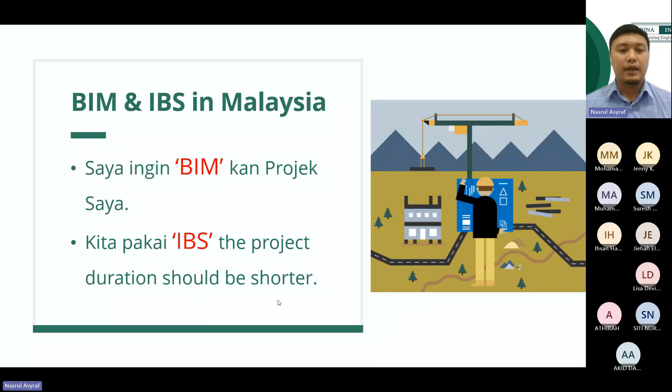And now we are at the stage under substructure.

So a brief introduction on BIM and IBS. BIM is Building Information Modeling, a process using virtual and technical data to create a model of a building or infrastructure. IBS, Industrialized Building System, refers to the prefabrication of structural components which are assembled into a building or infrastructure. Both are two distinct but complementary technologies in construction, both modern methods used in the construction industry. One is BIM, which is virtual, and IBS is physical assembly.

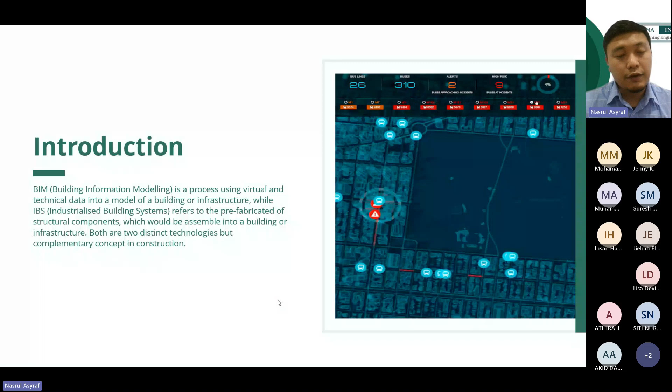With IBS, we manufacture and prefabricate in the factory, which is isolated, so we can control the quality, the manpower, and the condition of the environment. After that, we deliver the precast or prefabricated IBS on site and assemble it there.

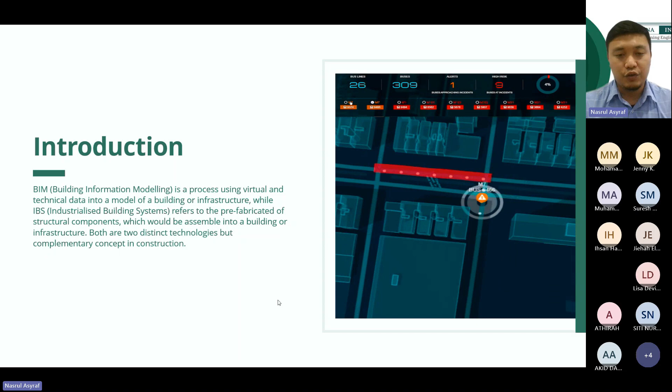While for BIM, in the past we used hand sketches - this was before, maybe our great grandfather's time, sketching manually on technical drawings. After that we had computer aided design, CAD, commonly called AutoCAD, though AutoCAD is actually a product. We draft all the technical drawings into AutoCAD, and it comes out as a CAD drawing file. Now we have BIM.

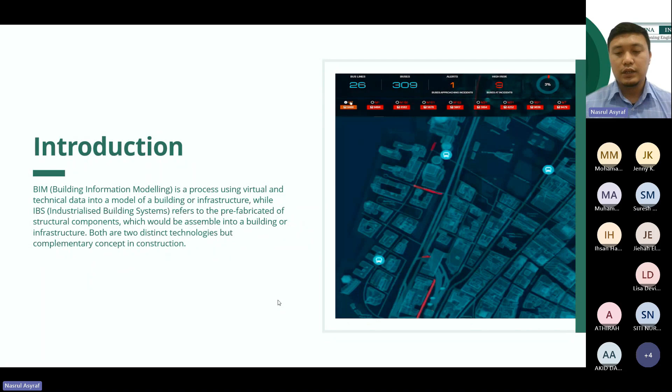BIM is a part of IR 4.0. So what is IR 4.0? It's Industrial Revolution 4.0, which is happening now and will go further, using all the latest technology, including the internet of things. The technology will grow stronger through the collaboration of all technologies.

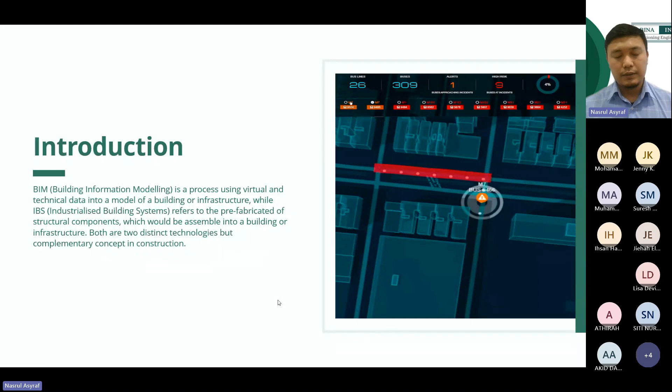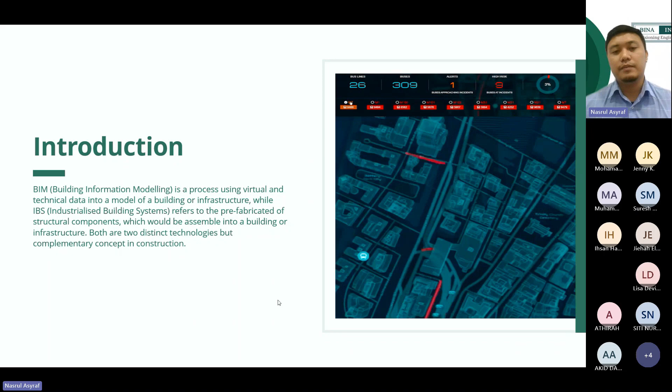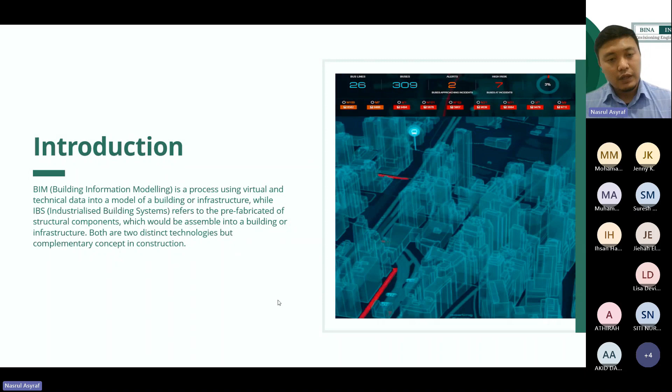Now we don't have manual things anymore, but there's still some part using CAD. In Malaysia we want to push BIM further, because other countries like our neighbor Singapore have adopted it more - last year it was 80% for all projects in Singapore. But in Malaysia right now, we have adopted around 55%, if I'm not mistaken, as reported by CIDB Malaysia.

So let's move on to the definition of BIM and IBS. Modeling, technology, and an associated set of processes to produce, communicate, analyze, and use digital information models throughout the construction project life cycle. This is sourced by CIDB Malaysia.

There is no fixed definition of BIM because every country has their own definition, but in some ways we focus on a single point, which is to communicate, analyze, and use a digital information model. So digital representation is BIM, which is the visual of the building or infrastructure. This is most of the definition by other countries and regions.

Next we have IBS: a system or method of building construction in which components are produced in controlled conditions in the factory or on a construction site, transported and installed during construction with minimal use of workers on site. This is also reported by CIDB Malaysia.

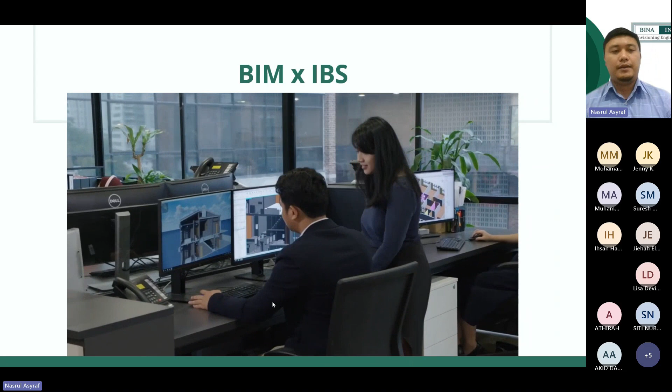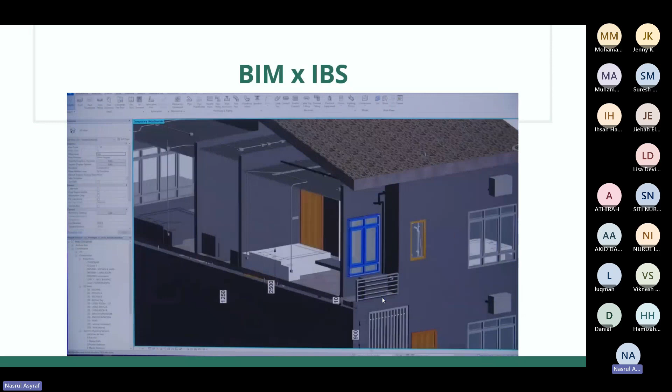Modeling, or BIM, a digital process that integrates the design, construction team, and all relevant stakeholders, improving precision, speed, and coordination from design to delivery. BIM is a digital platform that provides real-time access to project information, enabling visualization of the product throughout the development stage, thus making informed decisions to develop it.

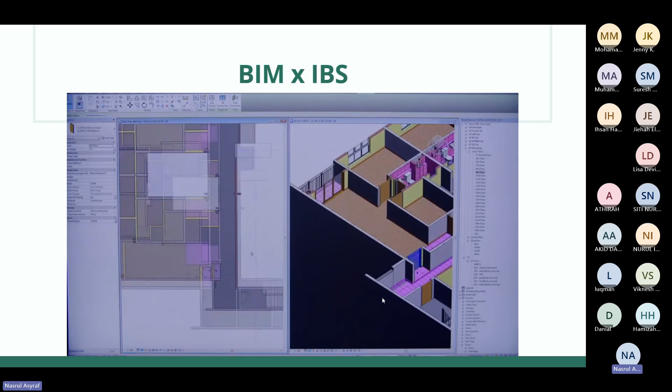BIM enables our designers to analyze and optimize each design and development to achieve higher Green Building Index, or GBI, scores.

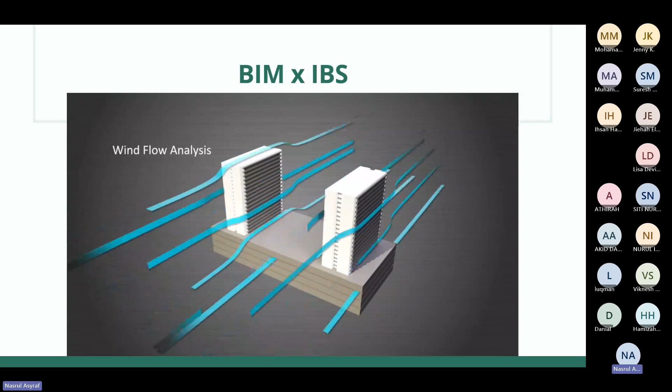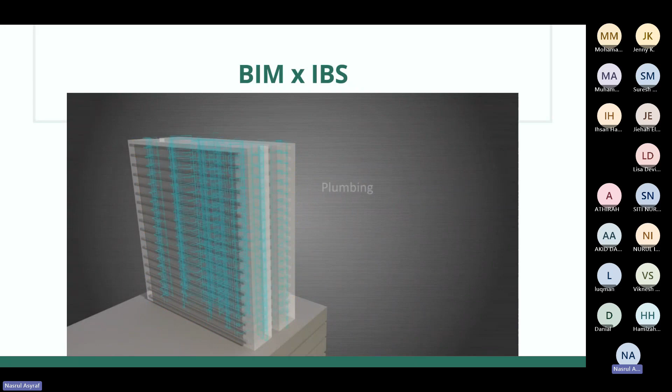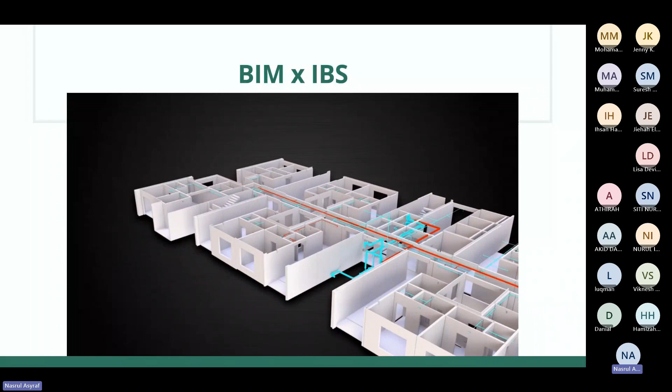The conceptualized 3D designs are then further developed by combining architectural, structural, mechanical, electrical, and plumbing elements. BIM is capable of analyzing these integrated models using clash analysis, and any design clashes can be amended, thus reducing errors and increasing efficiency. These integrated models also incorporate the elements of time and cost, enabling the construction program to be visualized virtually.

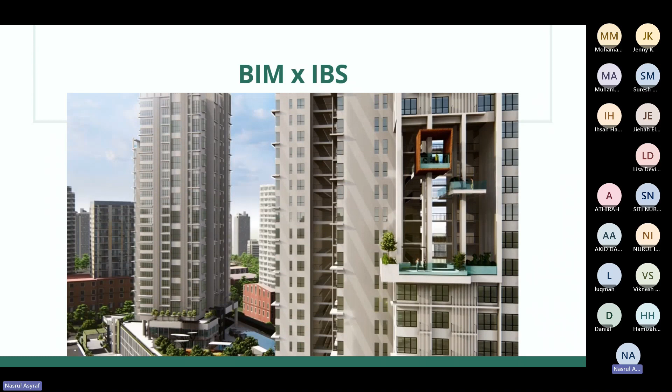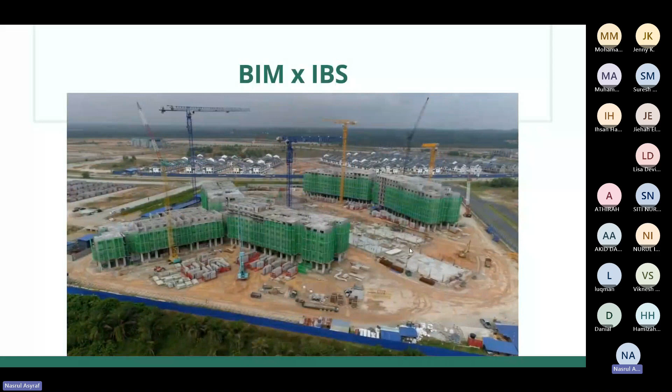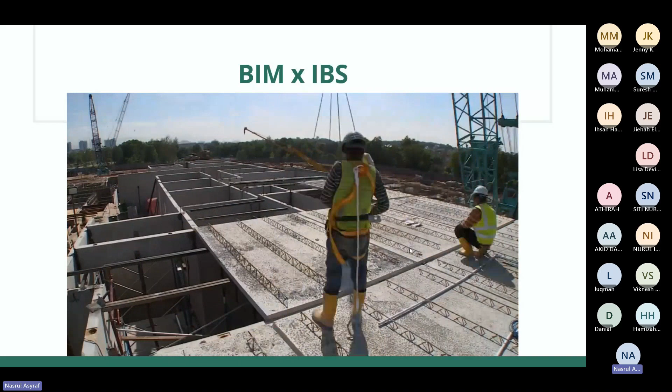Homes for Gamuda Land projects are constructed by Gamuda IBS, Malaysia's first fully automated digital industrialized building system factory. With this technology, homes are produced with stringent quality standards. Construction is faster, and wastage and environmental pollution during construction are reduced.

Okay, so that is how BIM and IBS collaborate into a single project, explained in a short amount of time. Okay, so let's move on. Modeling or...

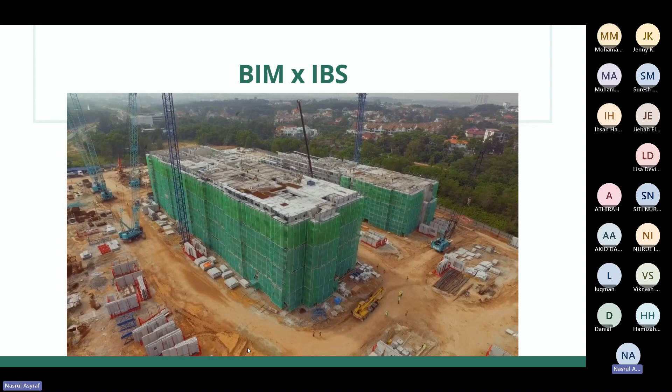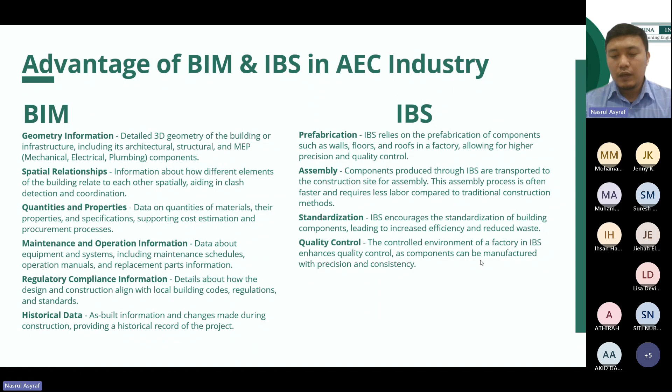So the advantage of BIM and IBS in the AEC industry. I put it in a separate statement here for BIM and IBS, and then we can see how the benefit of the collaboration and integrating of BIM and IBS will shoot up the productivity. Okay, now we start with BIM.

So geometry information. By having a BIM, we can have a detailed 3D representation of geometry. Just now we went through the video where we saw there's infrastructure, there's an architectural component, structural, mechanical, electrical, and plumbing. Having all of this, we can coordinate all of it within one software.

So in this software, when we coordinate all this, we can reduce the time for us to encounter any discrepancy afterwards. During construction, we can avoid all of this discrepancy and issues on site. So when we see this early on, we can make a change directly before the construction even starts. Okay, so that is geometry information - we have the geometry information of all the things.

Next, we have spatial relationship. Spatial relationship is where we use the space by calculating all the space that we are occupying and what space is left. This is good for the architecture, so the architect can foresee all of these components when they place it on the layout of a building or infrastructure, and they can plan it ahead.

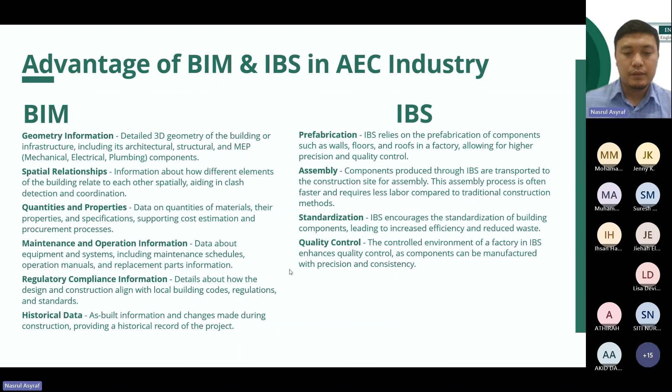So having this, it will impact the project directly or indirectly. For instance, having the conventional way, we might have spent a lot on material. So all these raw materials, when done on site, some of it may spill over, some of it may have a defect before construction even starts, and there's a lot of factors, like maybe rain, then after the rain they wash away all the sand, salt and cement.

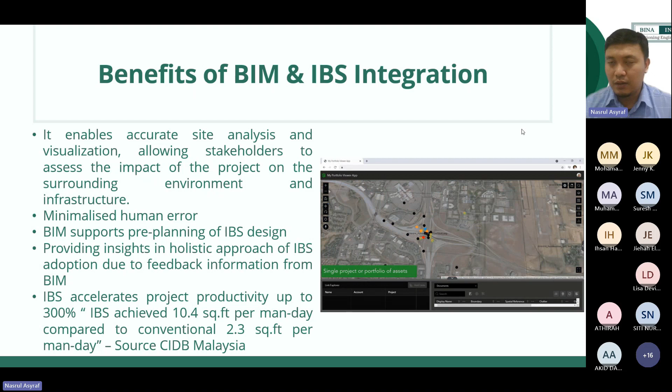This can be a factor that reduces the acceleration of the IBS project. But still, if we compare it to the conventional way, it's still good enough.

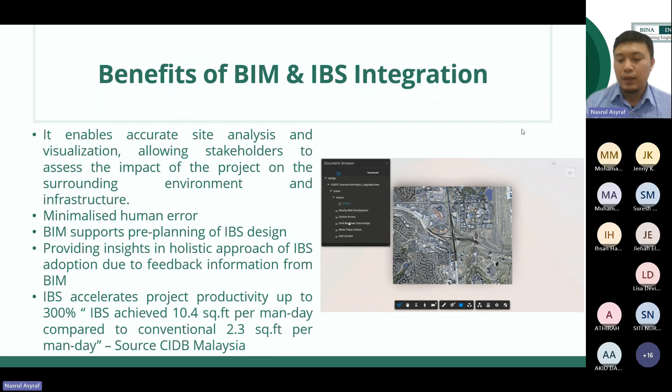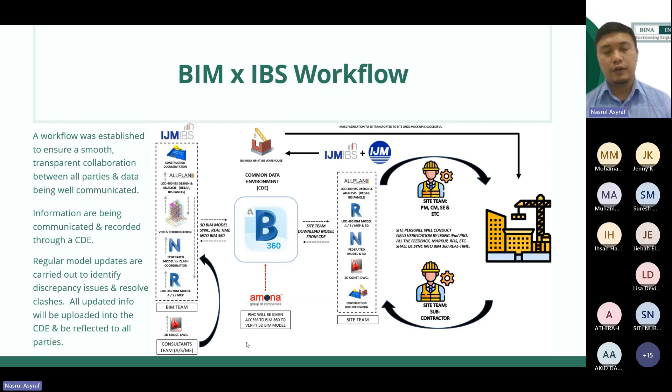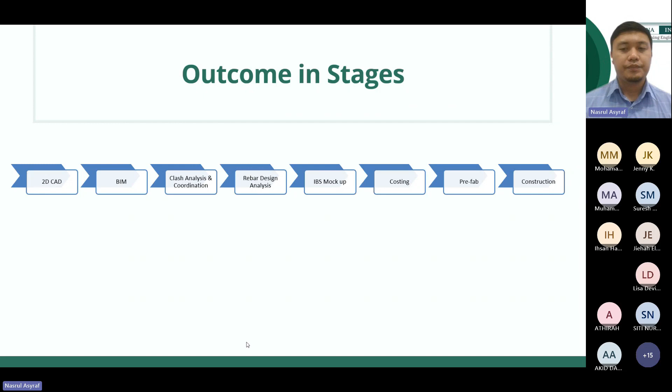Then we do an IBS mockup. We put the IBS mockup as a way to see how the final product looks. We need a mockup to see what we can improve or reduce. This helps minimize issues when the IBS components are delivered on site, where there might be discrepancies or issues during the assembly process. Having this mockup gives us a lot of insight.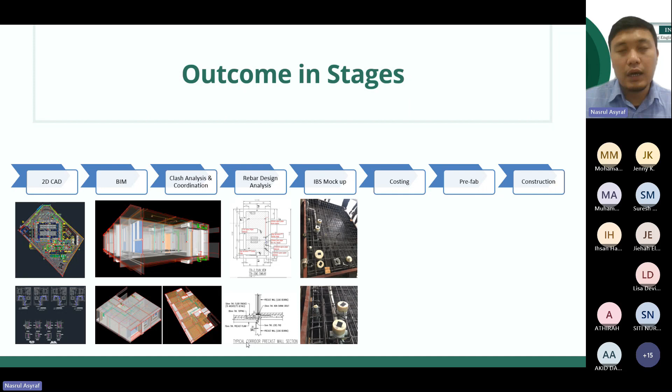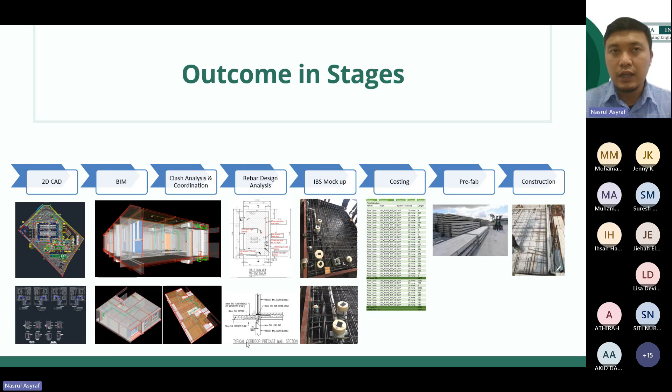Next, we have costing. As I mentioned, we can do extraction on the quantities and properties, and later put the cost on each of the quantities. Then the prefab process: all these prefab components are ready-made and ready to be delivered on site for construction, where we do the assembling process.

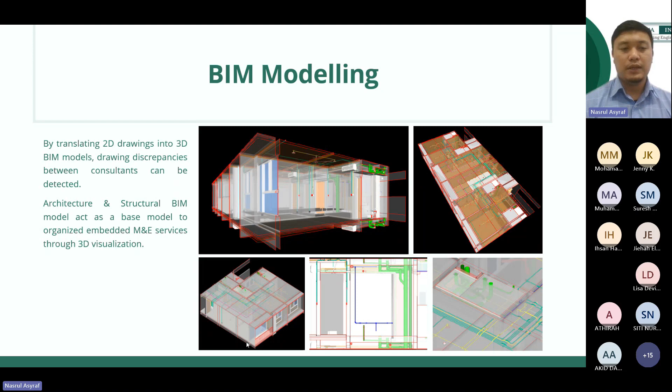So this is one of the BIM modeling, translating 2D drawings into 3D BIM models. Drawing discrepancies between consultants can be detected. The architecture and structural BIM model act as a base model to organize embedded M&E services through 3D visualization.

Next, we have clash detection and coordination. Clash analysis was carried out to identify issues regularly and resolve them prior to prefabrication, as I've explained.

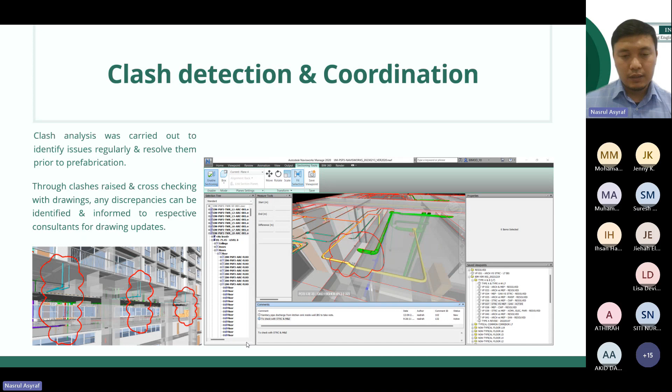So next, we have documentation. Documentation is a great way to detail out all the components needed to plan for IBS manufacturing, such as the opening for pipes and so on, as we can see in the sample here.

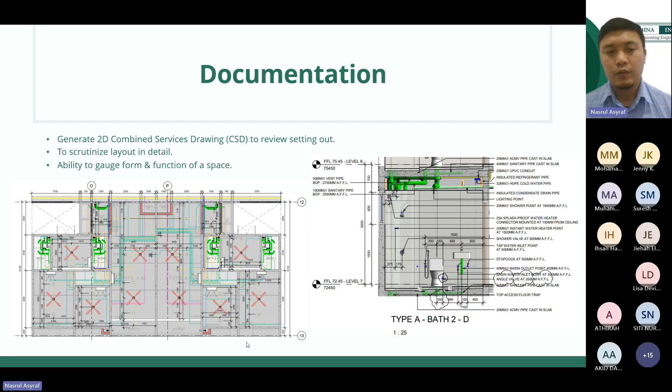Next we have quantity extraction and cost estimation. I mentioned the ability to extract quantities to assist with assessing costing during the tender stage, and later during construction we can follow up on what has been spent and what has been done on site. Here, for example, domestic cold water piping length was extracted to estimate cost of pipe items and labor, installation, and patch-up work.

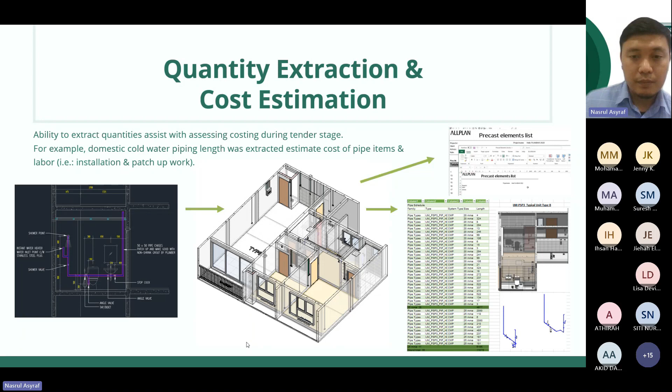Next we have construction detailing. Rebar detail is designed based on the coordinated BIM model. The details are analyzed for performance, constructability, and practicality for transportation to site. This is one of the views from the Allplan software.

In Allplan software, they can place all these rebars automatically. There's a template already set up, so the calculations are already there, and they place the rebar as required. Then they can assess it, analyze it, and go straight to prefab automation by the robot.

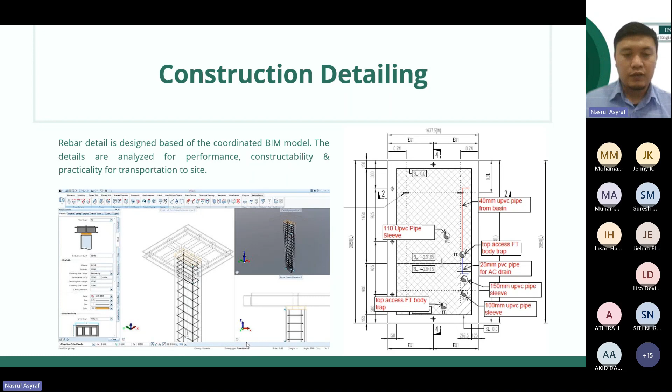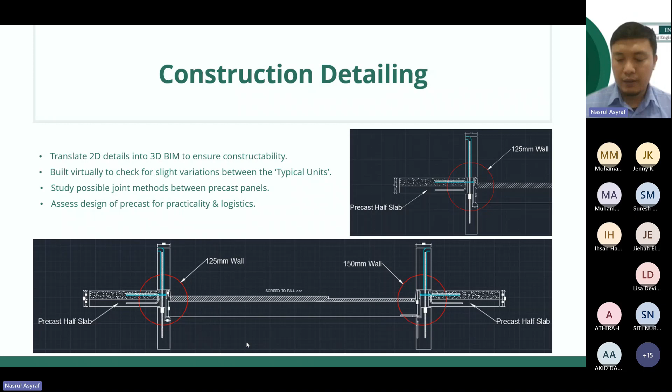Next, we have an IBS panel mockup. Here is the panel mockup that I've been explaining. Having this panel is important as a solid prefab component, and it can work well with the mold.

This mold needs to be designed based on what has been designed in BIM or in the drawing. It's an alternative, or the counterpart, of the formwork that would be done on site for in-situ casting.

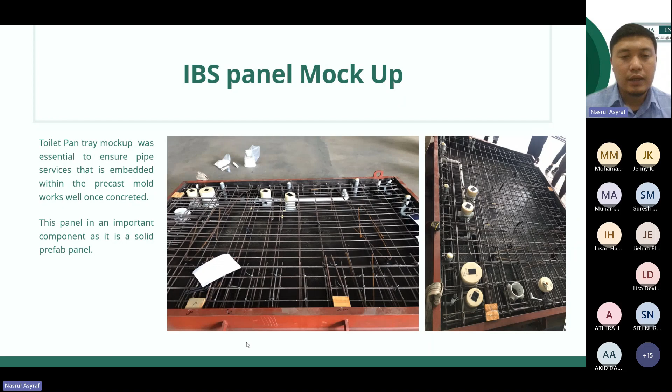Next, here is the detail of the components. We set out the pipe fittings as per the coordinated layout to ensure the pipe slope is set correctly. Sanitary pipe size and fittings are determined correctly as designed, and the pipe sleeves and fittings are placed to provide for openings.

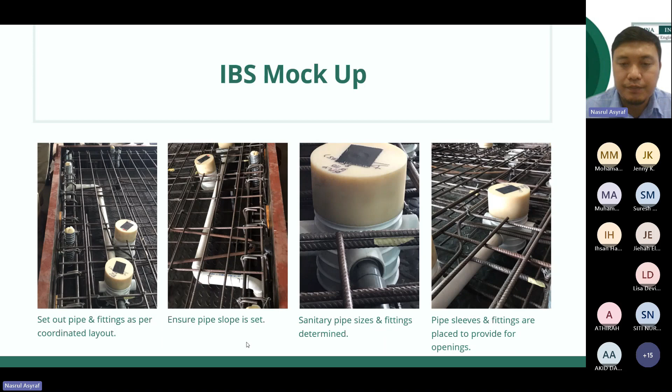Next we have the IBS installation plan. Installation is carried out in two zones, starting from zone A toward zone B. As you can see, there's a numerical value here, 1, 2, 3, 4, 5, 6 and so on, representing the zones that need to be done in sequence.

So we will start from zone A. This depends on the project scale. This is part of the Pantai Central Park project, which uses a typical floor and typical unit, with a few slight variations on the unit type, but it can still be done.

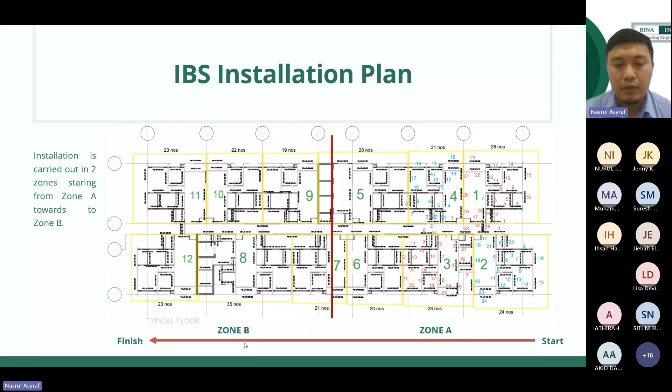Here's the IBS installation plan in a blow-up view. You can have two teams: one for the slab, to assemble the slab and beam, and another team to assemble walls and columns.

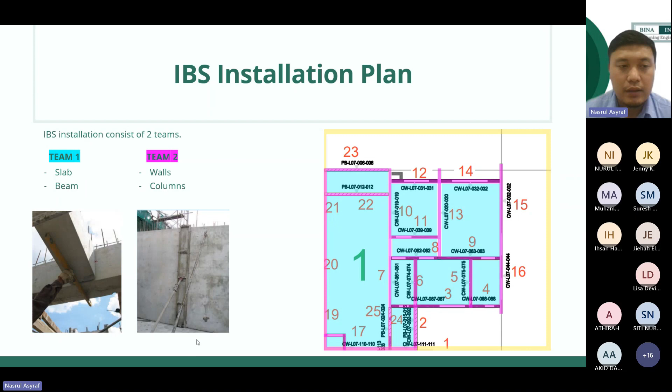Here is the IBS installation process. As you can see, there are only a few workers in this picture, because the workers only need to do the assembly process, since the components have already been prefabricated in the manufacturing factory. As a result, you only need skilled workers to do the assembling process on site.

Compared to the conventional way, you need a lot of workers to set up the formwork and the structural rebar. For the rebar, you need 3 to 5 workers to do the bending and cutting, and then they need to insert it into the formwork before they can start casting.

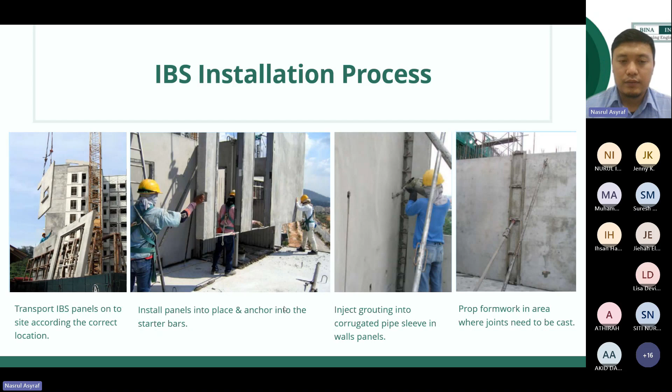Here is one of the simulation processes as viewed in Navisworks. We do a simulation of the IBS sequence, showing how we install and assemble it on site.

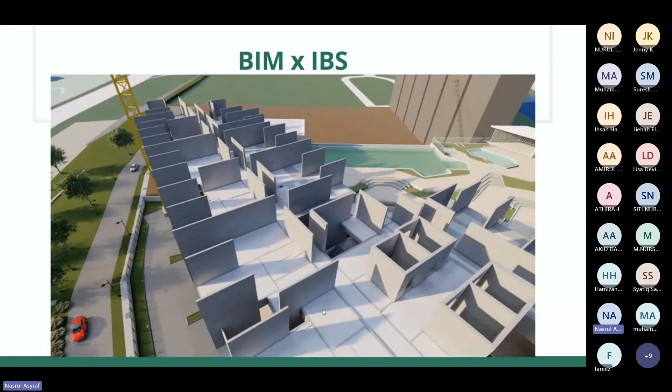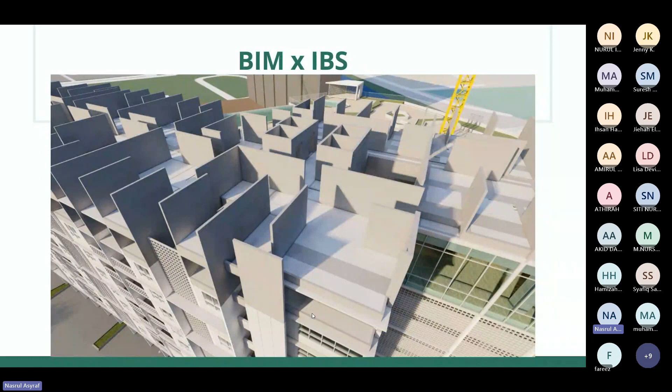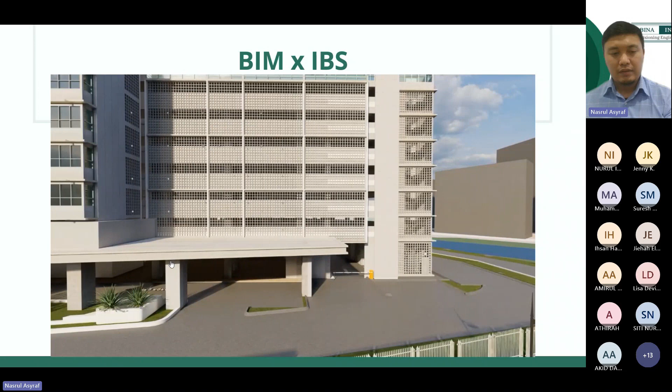Okay, so that's all the video. You can see how we put it in the sequence, how the wall assembles. So by sequence we have a wall first, then a column, then we can start building on the flat panel, right?

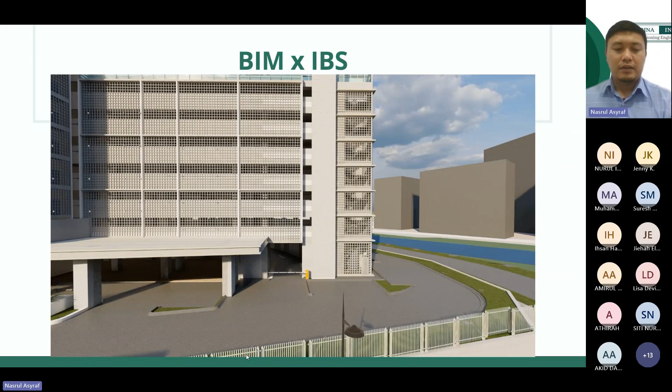So we are at the end of the last part of our journey here, how BIM and IBS can ramp up the productivity of construction.

Here's what we see in BIM and IBS for the Pantai Central Park 3 project. One is to evaluate constructability and the most cost-effective method of construction. They have a budget of what needs to be done for this project to progress. Having this method using hybrid conventional and IBS, they save a lot of money, which they can invest into other things, like maybe a green building method.

Then we can avoid discrepancies and clashes by identifying them early on visually using BIM before it's constructed on site. Then we have visualized detailed information such as construction joint connections.

Then we have improved decision making during the design stage coordination on VDC sessions, or virtual design coordination. We have VDC sessions with our stakeholders, with the consultants, owners, and the contractor.